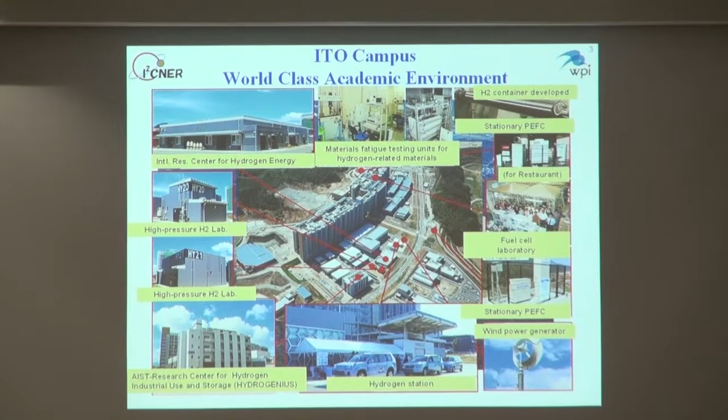I²CNER came into existence from a long collaboration between Kyushu University, which is a world-class academic environment with the best funded, best equipped facilities in the area of hydrogen research. The Hydrogenius Institute is a unique institute in this Ito campus, which you can see by taking a 10-minute walk down the road. And, of course, the University of Illinois, which is an institution with many years of tradition and impact.

In order to understand where I²CNER fits in the entire Japan energy policy, here I try to summarize the main points of the Japan energy policy, which I took from a presentation that our program officer, Professor Kazagi, gave. As you can see here, the energy policy is to facilitate renewable energy introduction.

I²CNER is all about renewable energy, clean and efficient use of natural gas and coal. I²CNER promotes CO2 management and mitigation.

Greenhouse gas emissions - this is the target that Japan had, slashing emissions by 25%. As we've read in the newspapers, this is something that is very difficult to achieve. The Japanese government has decided that we have to revise this. I²CNER is here to help the government of Japan toward this mission and objective.

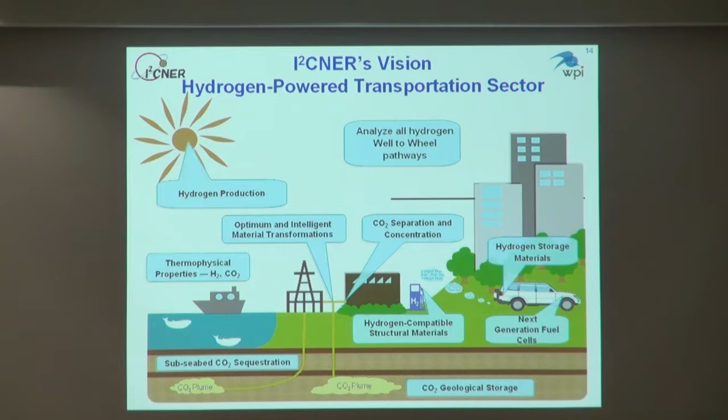In the case of our research agenda, we are organized in thematic research areas. This is a very busy slide that essentially shows how we are researching toward addressing these carbon neutral technologies. We have a thematic research area, a division as we call it, on CO2 separation and concentration.

We have one in thermophysical properties, where we try to understand the properties of gases at high pressure and high temperatures. We have hydrogen structural materials, where we try to understand how hydrogen interacts with structural materials. We work on next generation fuel cells, trying to address issues of durability.

We work on hydrogen production. I told you about photocatalytic hydrogen production, carbon capture and storage. We want to store energy, and of course we are working on issues of catalysis, materials transformation, and waste of energy in chemical reactions.

These are thematic research areas that are not isolated. They have common threads. For instance, catalysis is an issue that pervades many thematic research areas, such as next generation fuel cells and hydrogen-compatible materials, because you have the catalytic reaction when hydrogen gets absorbed into the materials, or in the case of carbon, how it interacts with saline water when sequestered. At the interface, what types of chemical catalytic activity we have.

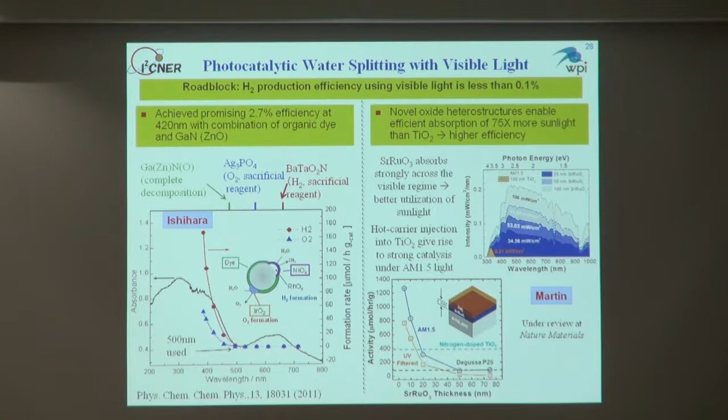We also try to push these efficiencies higher by using organic photovoltaics. My colleague Professor Adachi is using control of molecular orientation in layered organic semiconductors, and he is coming up with efficiencies that are quite high, almost 6.3%. If we push it to about 10%, then we may be able to talk about technology. So we are pushing hydrogen efficiencies here through all fronts, organic and inorganic semiconductors.

At the same time, in the area of organic semiconductors, we came up with third generation organic materials for LEDs. This work was just published in Nature, and Professor Adachi managed to come up with 100% electron to photon conversion. Organic LEDs is an interesting topic because my energy analysis division informed us that if we use organic LEDs judiciously in the United States, we can reduce primary energy use by almost 2%. This is something we need to take notice of. Professor Adachi is leading the way here.

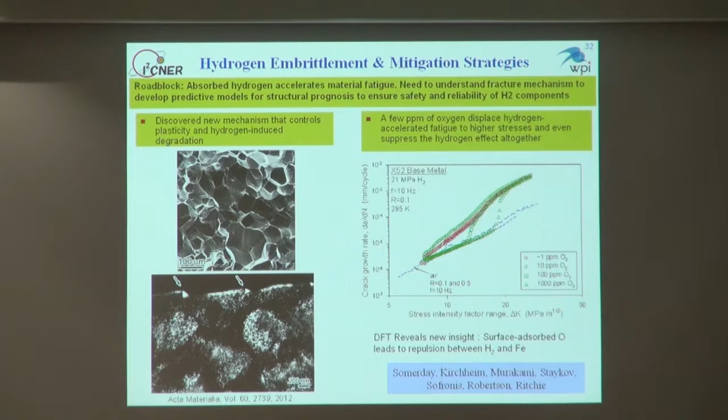In the area of structural materials, we are working to mitigate the degradation effects that hydrogen has on structural materials, because we need structural materials to transport hydrogen. I believe we are leading the world here. Our University of Illinois team and Kyushu University are leading the world in mitigating hydrogen degradation effects. Dr. Somerday from Sandia National Laboratories, who is leading this division, will give you an in-depth analysis of what goes on in this area.

We are working in the area of fuel cells using futuristic concepts. For instance, we try to understand molecular catalysis for fuel cells, and my colleague Professor Ogo informs me that perhaps we at I²CNER are the first example of a developed precious metal-free molecular cathode. This is something I would like to draw your attention to. I hope this will make news. This is something I²CNER will be proud of pretty soon, I believe, at least according to my colleague Professor Ogo.

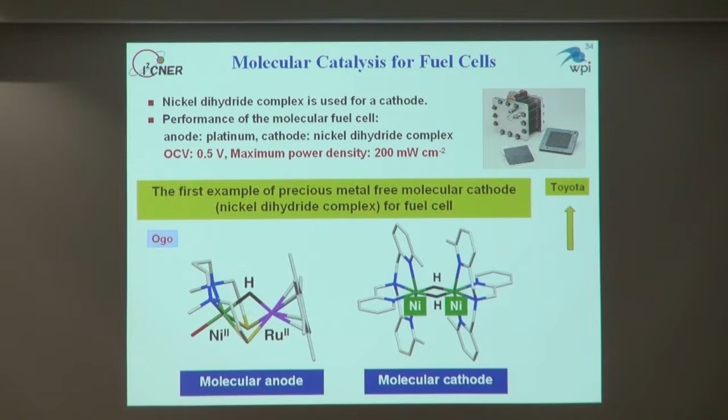We are working on turning CO2 into a useful product. We have a wonderful collaboration between Professor Paul Kenis, head of the Chemical Engineering Department at the University of Illinois, and Professor Naotoshi Nakashima here at Kyushu University. They are trying to use sunlight, passed through an electrochemical reactor, to turn CO2 into either a useful gas or a fuel. They tell me they recently achieved efficiencies of 45%. Remember, to go into technology we need energetic efficiencies greater than 50%. This project is an emblem of American and Japanese collaboration, and pretty soon I'm expecting we will have results here too.

Another project we are working on, as you've seen in the tour today, is the properties of supercritical CO2. I believe we are perhaps one of two universities in Japan devoted to fundamental science about properties of CO2. There are technology-driven centers in Japan for sequestration, but here at Kyushu University we are building fundamental science.

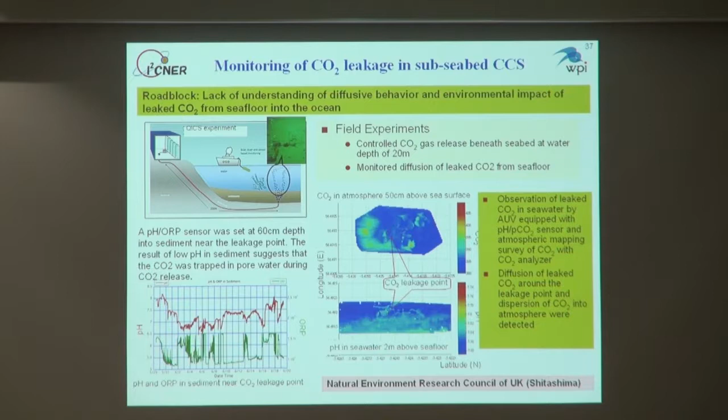Another example is that we are building science to monitor possible leakage of sequestered CO2. One of my colleagues, Professor Shitashima, works with colleagues in the UK for an experimental investigation of leaked CO2 sequestered on the sub-seabed. Professor Shitashima is checking the distribution of CO2 two meters above the seafloor, or 50 centimeters above the sea level. So we are developing these types of capabilities.

At I2CNER, as you know, we are a young institute. We are 2 years old, but this doesn't prevent us from garnering awards. I'm proud to present 3 I2CNER researchers who received the 2012 Somiya Award. This award requires researchers from 2 continents to be given, but here we have I2CNER researchers from 3 continents.

Professor Tuller from MIT, Professor Kilner from Imperial College, and Professor Ishihara, lead PI of our Hydrogen Materials Division.

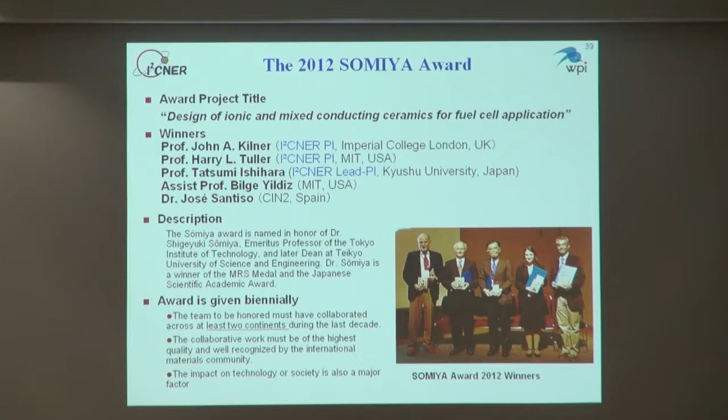The next topic I'd like to touch upon is that we are making fusion and interdisciplinary research the center of our operations. As you've already seen, we are collaborating, bringing disciplines together. Upstairs during the tour, we showed you a whole-system approach for energy production: capturing sunlight, storing it into a storage medium, feeding hydrogen into a fuel cell, and then getting back into the grid. This concept needs serious analysis because we need to analyze the various efficiencies of the entire system.

The optimal operation of the entire system doesn't depend on whether each component operates optimally. Sometimes one component needs to operate less optimally, and we try to understand how this energetic analysis needs to be informed by the technology involved. This is a very interesting concept, and hopefully pretty soon we will have results here too.

Again, I2CNER is about internationalization. I would like to read what United States Ambassador John Roos said on December 4th last month: 'What I do worry about is that the people-to-people ties, the ties between our younger generations—if our younger generations don't know each other, then the bonds will get weaker.'

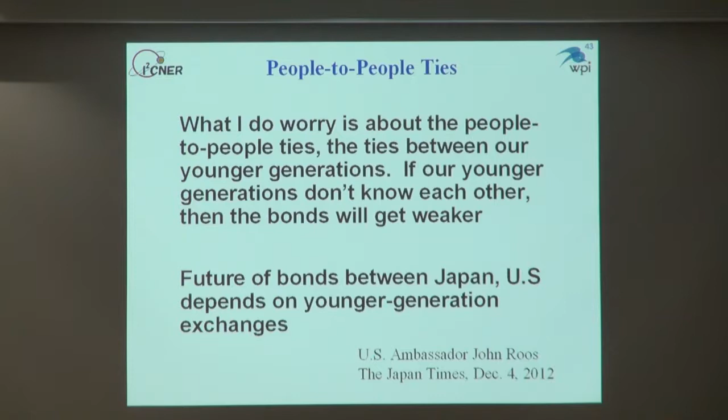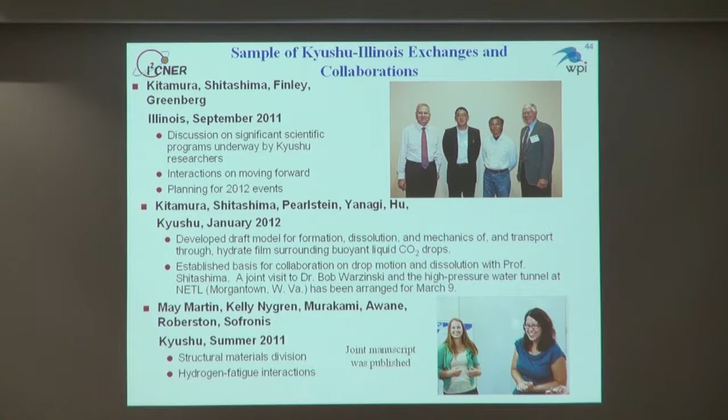I2CNER is a project that impacted activities beyond engineering—it impacted the activities of librarians at the University of Illinois and at Kyushu University. On February 1st, we had a presentation by our chief engineering librarians, Bill Misko and Mary Slembach, in collaboration with the Kyushu librarians, Amano and Omura. These four people, working together across the Pacific, are going to give us a set of scholarly information services that provide enhanced access to a myriad of online information resources.

It is going to be a wonderful tool for our I²CNER researchers. We can work together between the Kyushu libraries and the University of Illinois libraries. The librarians at both universities loved this project, and they tell me they love to search. We, the researchers, love to find. The librarians love to search. And searching between Japan and the US was wonderful for them. So we'll hear them February 1st.

Sandia National Laboratories - we are privileged here at I²CNER to have along with us Dr. Somerday, who is in the audience. He is leading the structural material division within our institute. He is a fellow scientist of the Sandia National Laboratories, and he is working with us. So in other words, here we have another international component, not only with the United States academia, but also with the United States laboratories.

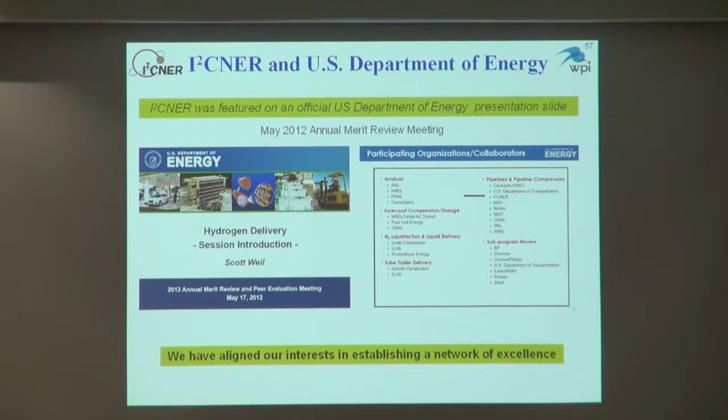Before I close, I would like to thank the Kyushu administration, President Arikawa, who is helping us get this project, to ramp it up, to move it from a transient to a steady state. They promised us we would have a building in January 2013. Yes, indeed, we are here in this very building enjoying it today. So we have Kyushu University behind us, and that is a good feeling that we are going to succeed.

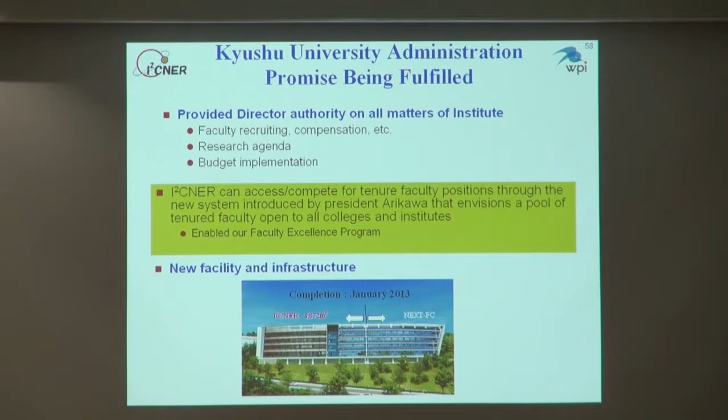17 exajoules. The US uses about 100 exajoules. Out of this energy, let me focus on the electricity. It uses primarily 7.44 - this is what it needs. This is what we get out: about 4 exajoules of energy annually. And as you see, the electricity supply is producing about 46% of the CO2 emissions.

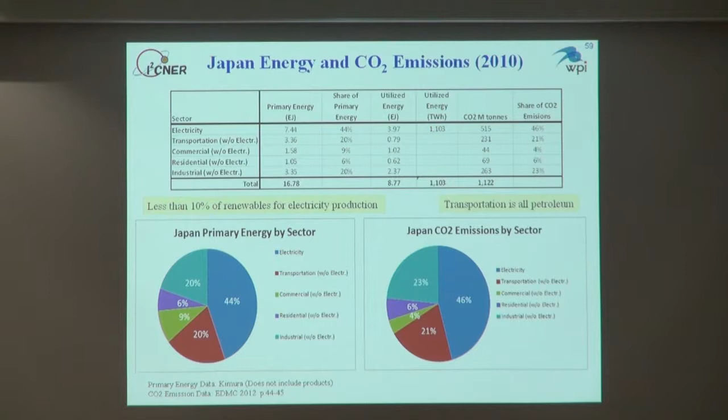So this is a very big chunk of the CO2 emissions, because electricity production essentially is based on fossil fuels here in Japan. So what I asked the Energy Analysis Division: can we do something here? Can we move away from fossil fuels? Can we do something renewable? Of course, this is a big concept for Japan. It is very difficult because the renewables are not as easily available.

They said even if we realize this medium potential that gives us the 4 exajoules, we need to develop cost-effective and efficient energy storage. Energy storage is the key concept for the use of renewables. So we are investing here in I²CNER in this direction. Hopefully next year I will know more about this and can show you where we are.

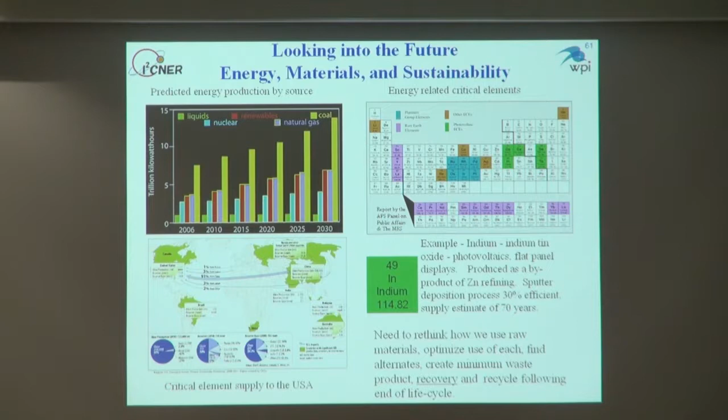Finally, we are thinking about the future. Sustainability is another issue. Key elements like indium are used for photovoltaics, but there is not an infinite supply of these rare earths, so we need to learn to use them sustainably. In order to do that, we need a radical approach away from classical designs, which focus on optimal performance. We need to also think about optimal recovery if we are to talk about sustainability. This is a concept I will hopefully revisit next year when we have more concrete plans for how I²CNER will evolve.

Before closing, I'd like to say we were honored by Crown Prince Naruhito, who visited our campus on October 1st. He talked with Professor Sasaki about fuel cells and fuel cell cars, and also helped refuel a fuel cell car.

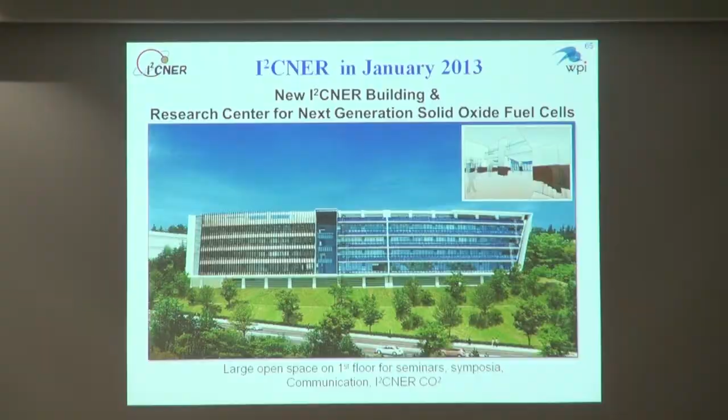Before closing, this is our building, January 2013. I'd like to draw your attention down here. We have the so-called I²CNER CO2, which means coffee and collaboration. This is something we do every day at 3 o'clock, we are out here in the hall sitting together for CO2, as we call it. Let's drink I²CNER CO2.

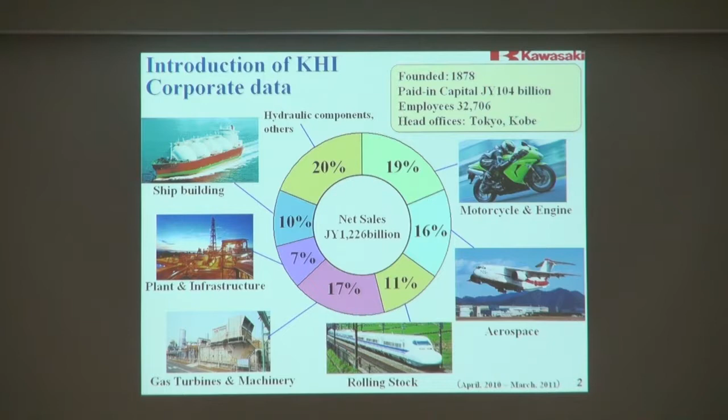This is part of the medium-term business plan of KHI, published 3 years ago. The president, Mr. Hasegawa, explained that KHI would promote the development of CO2-free hydrogen chain technologies. He said in the future primary energy will be renewables, nuclear energy, and fossil fuel with CCS. Secondary energy will be exchanged between electricity and hydrogen, mutually matching case by case. I think you can understand the meaning of CO2-free hydrogen. We are aiming at becoming the #1 manufacturer of hydrogen-related equipment. That is our company's policy on hydrogen.

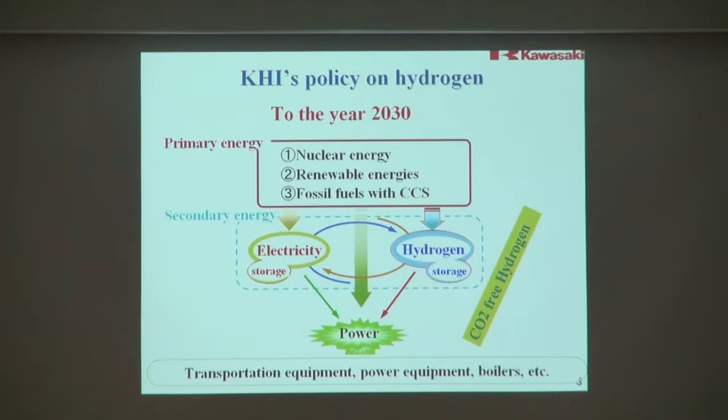I'd like to talk about the following: first, what is CO2-free hydrogen; next, introduction of the CO2-free hydrogen chain from brown coal; and finally, introduction of the HyGrid concept.

First, I'd like to talk about CO2-free hydrogen. We call it CO2-free hydrogen when it minimizes all CO2 emissions from production to utilization. There are various CO2-free hydrogen chain concepts which expand from overseas to Japan. For example, there is hydrogen from renewable energy such as hydropower, wind power, or solar power, and hydrogen from fossil fuel with CCS, such as coal, natural gas, or oil.

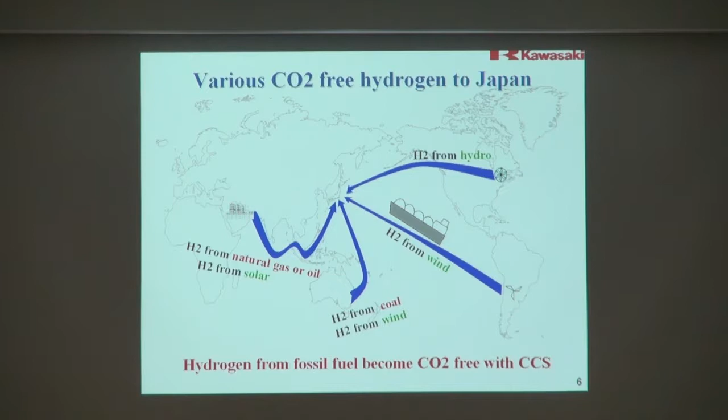We have simulated the demand of CO2-free hydrogen in Japan. The assumptions are shown in this slide. Cost of CO2-free hydrogen is 25 to 45 Japanese yen per normal cubic meter. CO2 reduction rate is 5% in 2015 and 80% in 2050. Nuclear limit is a maximum of 50% of total electricity. This simulation was carried out before the nuclear power accident. Renewable energy limit is a maximum of 15% of total electricity. CCS is impossible in near Japan.

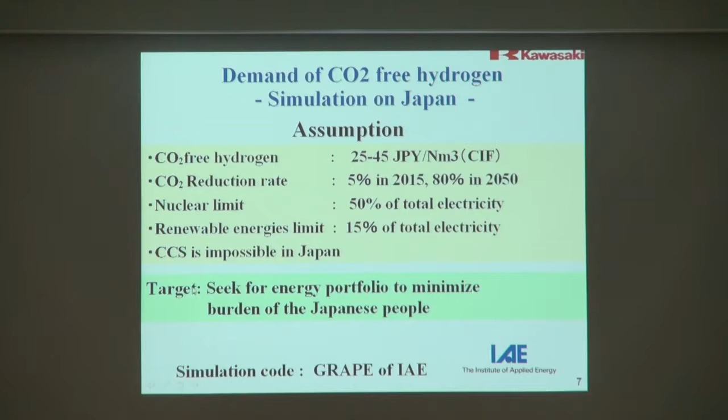This picture shows the sequence of the CO2-free hydrogen chain from fossil fuels. First, hydrogen is produced from fossil fuel with CCS. Then the hydrogen is liquefied, stored, and loaded onto a ship, then finally transported to Japan. In Japan, the hydrogen is used for hydrogen cars, fuel cell vehicles, hydrogen combined cycle power plants, fuel cells, cogeneration, steel making, and desulfurization at oil refineries. CO2-free hydrogen can contribute a huge amount of CO2 reduction as an alternative fuel.

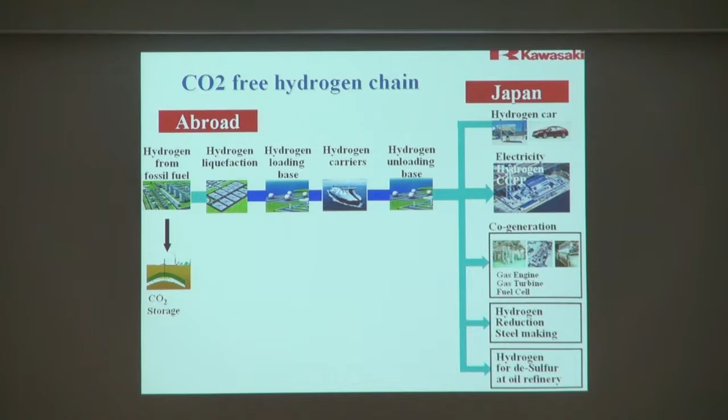About fuel cell vehicles and hydrogen filling stations. Japanese major automotive companies announced they would bring fuel cell vehicles into the global market in 2015. Japanese major gas and oil companies announced they would establish more than 100 hydrogen filling stations in Japan. The further future target is bringing more than 2.5 million fuel cell vehicles into the market in 2025.

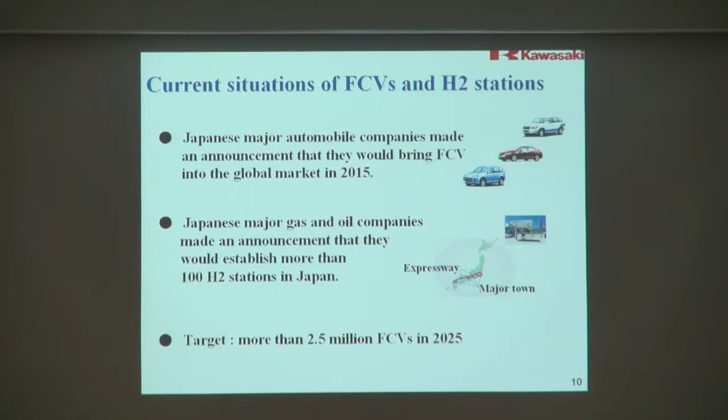About steel making with hydrogen reduction. The steel industry in Japan agreed with the Japanese government to reduce CO2 emissions by utilizing hydrogen in the next generation steel making process. They say the technology will be established by 2030 and industrialized by 2050.

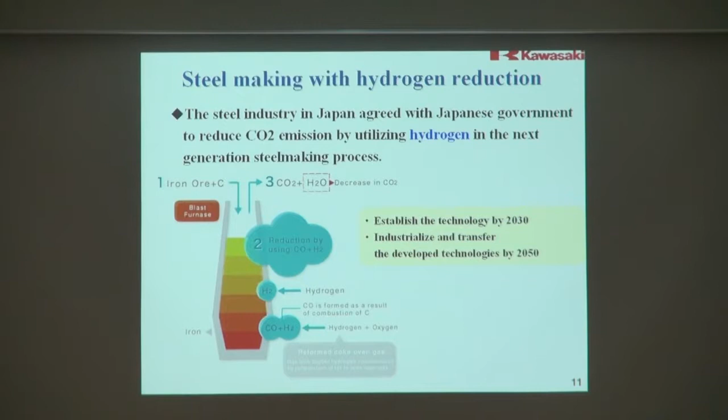About hydrogen for desulfurization at oil refinery. At oil refineries in Japan now, a huge amount of hydrogen is produced through the refinery process and consumed for oil desulfurization. A huge amount of CO2 is byproduced through this operation. If we convert this hydrogen to CO2-free hydrogen, we can reduce the huge amount of CO2.

About recent discussion for future energy strategy in Japan. After the earthquake and Fukushima nuclear power plant accident, CO2-free electricity from nuclear will not be expected. We are proposing the introduction of CO2-free hydrogen from fossil fuels. The points are low cost compared with renewable energies, massive and stable supply, and storage is possible, we say. This is the concept of the CO2-free hydrogen chain.

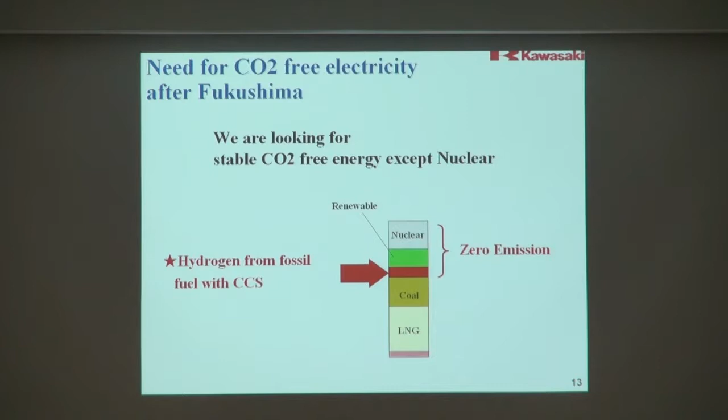Next, let me show the CO2-free hydrogen chain from brown coal. KHI has studied the CO2-free hydrogen chain from brown coal in Australia. I will introduce it. Hydrogen is produced by gasification of brown coal. The chain sequence is the same as what I mentioned before. We aim at operating the first commercial chain in 2025. We are speculating that more than 40 chains will be made by 2050. Incidentally, before this large chain, we are planning a small-scale pilot chain in 2017.

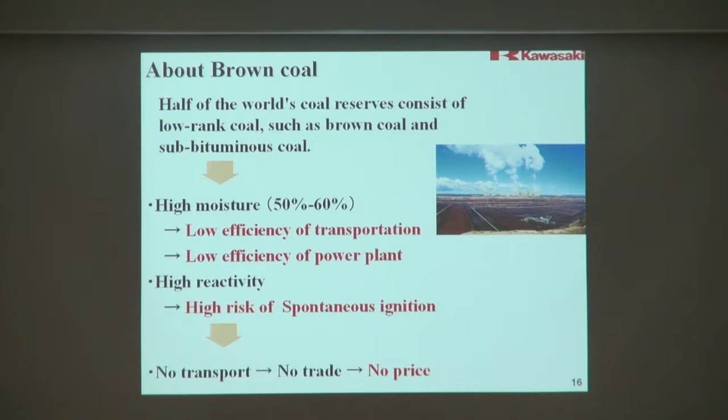I mentioned about brown coal. Half of the world's coal reserves consist of low-rank coal, such as brown coal and subbituminous coal. About characteristics of brown coal: it is high moisture, so low efficiency of transport, as well as conveying water. Furthermore, a severe problem is spontaneous ignition of dried brown coal. So now brown coal has no transport, no trade, no price in the world market. This is one of the cheapest fossil fuels.

We have conducted a feasibility study of this project in cooperation with Australian companies and with the support of both the Japanese and Australian governments. We studied such things as: where is the location of the hydrogen production plant? Where is the location of the hydrogen loading base? Which route should we take for the hydrogen pipeline? Is CCS possible? What are the regulations about hydrogen in Australia? How much are construction costs, facility costs, CCS costs? We went on with them.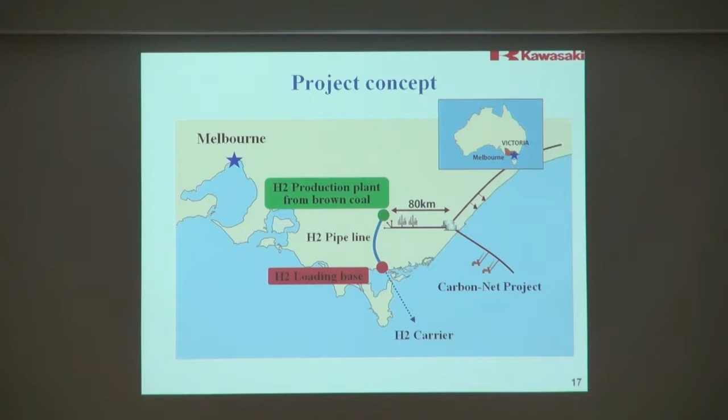This picture shows the hydrogen loading base and hydrogen carrier. You can see the liquefaction plant, storage facility, and loading place in far. Hydrogen of 770 tons a day is liquefied, stored, and loaded to the hydrogen carrier. The hydrogen carrier can load hydrogen of 11,000 tons per one time.

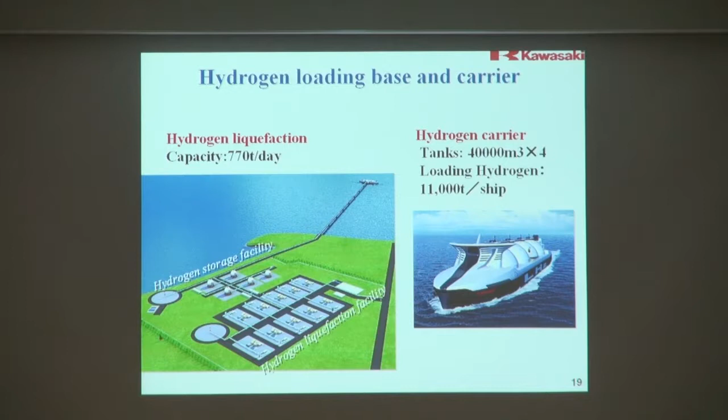In this case, transported hydrogen to Japan is 225,000 tons a year. Hydrogen cost CIF is about 30 yen per normal cubic meter. This amount of hydrogen can operate 3 million fuel cell vehicles, and it can reduce 5.7 million tons of CO2 a year. Or it can power a 650 megawatt hydrogen power plant, reducing 3 million tons of CO2 a year. It is a first chain. If the number of chains increases, we can reduce the cost, and we are expecting less than 20 Japanese yen per normal cubic meter towards 2050.

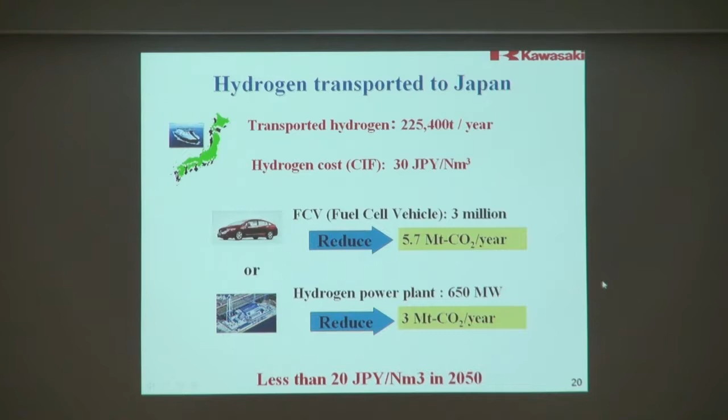There are 4 shortlisted projects of the CCS flagship program in Australia. As you may know, Zero Gen was rejected in 2011, and the Collie project in Western Australia was selected and put into the fiscal budget for the government in June 2011. Then CarbonNet was selected and provided the first budget of the government in February 2012. Currently, the CarbonNet project is in a phase of detailed investigations.

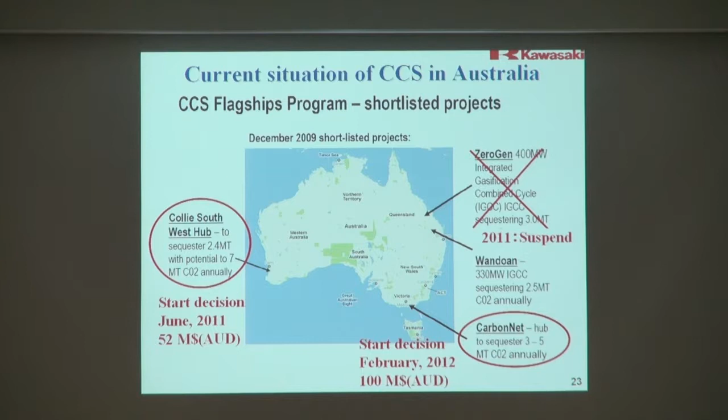So far, I spoke about CO2-free hydrogen from overseas. We started to study about utilizing hydrogen from renewable energy and its storage in Japan. As you know, Japan does not have much renewable energy compared with other countries. For instance, the capacity factor of wind power in Japan is at most 20%, but there are many places where it's more than 40% overseas. Therefore, we are considering hydrogen from renewable energy transported from overseas.

However, pure Japanese renewable energy is very valuable from an energy security point of view, although it is expensive. We have to use such hydrogen and electricity effectively, making use of their characteristics. The HyGrid study group aims at studying this.

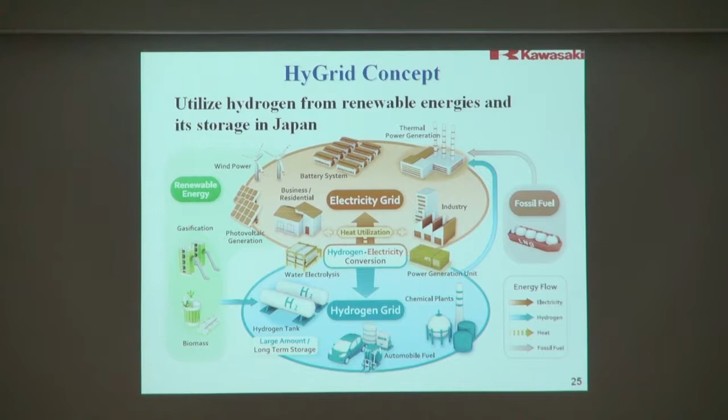This picture shows the HyGrid basic concept. It is possible for hydrogen to store large amounts of energy for a long time, so it can contain long periods of fluctuation of renewable energies such as wind power. On the other hand, battery is effective for containing a small scale of energy over a short period of fluctuation. So we have to construct a reasonable system combining hydrogen and battery.

We have to study how to utilize hydrogen as an energy storage.

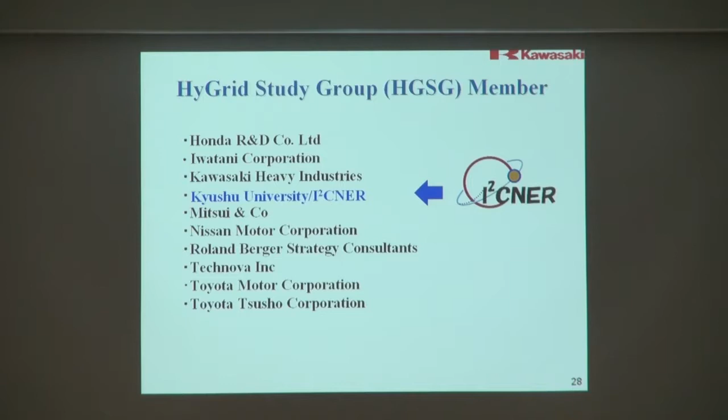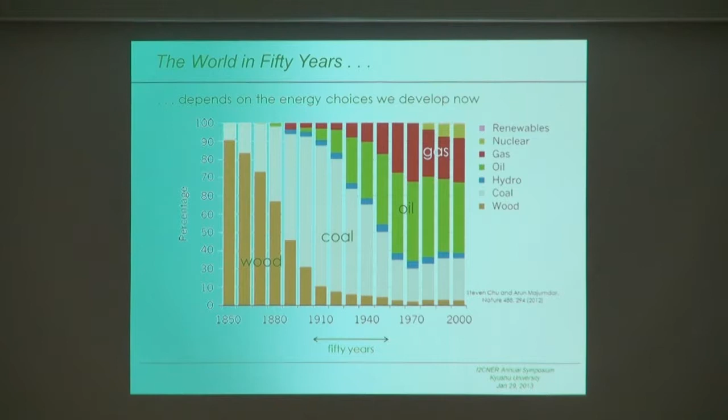So normally when you look at the 50-year future, the conventional approach is to take the present, ask what could happen, what kind of improvements in efficiency and cost reductions could occur, look at the relative costs of technologies, and project 20 or 25 years out. Hardly anyone actually projects 50 years out. What will happen? That's the future—that's the present extrapolated.

I would like to take a different approach. I would like to say, in view of the importance of energy for society, let's start with the kind of society that we want in 50 years, and then ask what kinds of energy technologies and innovations and discoveries do we need to enable that society. So it just turns the cart and the horse around.

The point is, again, 50 years is long enough for energy R&D to work. So we'll steer the energy society nexus toward the strategic society that we want, instead of simply taking the energy advances that occur and living with them.

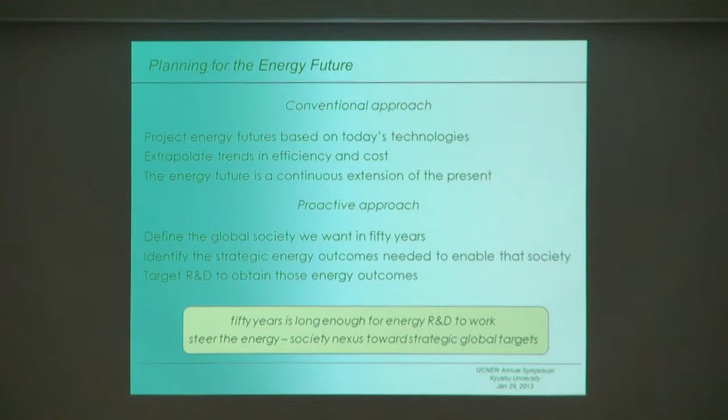Here's the kind of global society that I would like to have, and I think most of us can agree with many of these things, though you may disagree. Rapid growth of developing economies - China, Asia generally, India, Africa - these economies need to grow. Steady growth of the developed economies, because if they don't grow, they will lose the quality of life and lose the advantages they now have to the developing countries. So we want that as well.

Aggressive pursuit of discovery, science, and innovation, because that's how you get growth - it's from innovation and new technologies that growth occurs. Rapid deployment of the innovative technologies, that goes without saying. Lively communication, trade, and exchange of people and ideas across national and regional boundaries, a kind of globalization everyone should participate in, requiring interaction, as in the scientific world - interdisciplinary discussion and interaction is so important. And finally, a globalization of opportunity, so every country and region can participate in the technology, economic growth, social and cultural advances.

So the shorthand for this is a vibrant, interactive, inclusive, and rapidly advancing global society. If you take those as your guiding principles, you then ask, what energy outcomes do we need to achieve this kind of society? I've chosen three - you can do this in many ways, but I think these cover a lot of the ground.

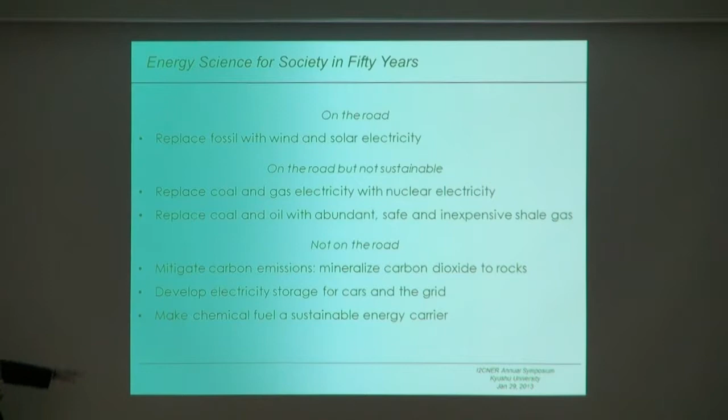The second category: on the road but not sustainable. I would say nuclear electricity is in that category. There are reasons - environmental concerns and fear of accidents - that keep us from deploying it on a wider scale. We need to address those concerns if we're going to make nuclear a player.

And the second one, shale gas. In the United States, it's rather abundant - we've been drilling with hydraulic fracturing to recover shale gas. The U.S. seems to be ahead of most of the rest of the world, but if you look at the resources, they're there globally. There's a challenge though - it's not sustainable, I'll say, because of the effect on the environment. But there are ways to address that issue.

So if you can address these two concerns, here are two opportunities. And then things that are not on the road and are a little bit more visionary: mitigate carbon emissions.

We all talk about, and we heard already today about, carbon sequestration geologically. There's another option I'd like you to consider, and that is turning carbon dioxide into carbonate rocks. It turns out this may be more feasible than you think.

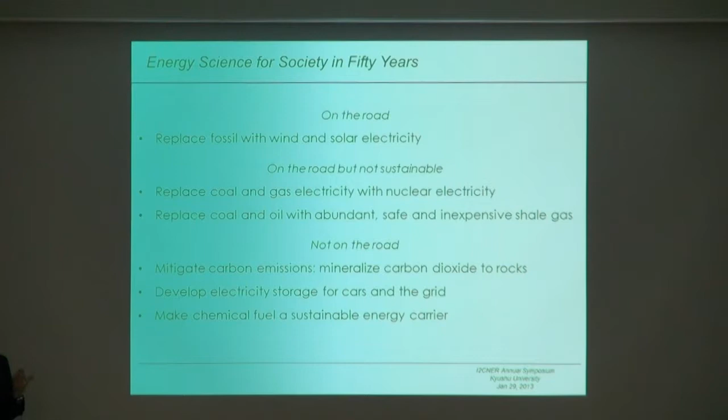Then develop electricity storage for cars and the grid so that we can have both transportation and renewable energy enabled on the grid at a large scale. And the final one: make chemical fuel a sustainable energy carrier. We've heard a little bit about that already.

So the first one, wind and solar electricity—this is US-centric. Here, since 1980, is the penetration of wind and solar on the electricity grid. You can see wind outpaces solar dramatically because it's a lot cheaper and the technology is more mature. This curve is rather steep—about 30% a year is the rate at which wind is increasing, and solar is not far behind. It's now about 2% of total electricity in the US.

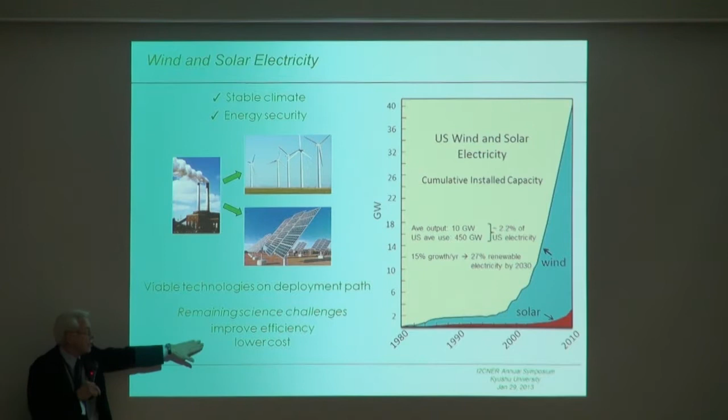But at growth rates of 30% a year—I've taken 15% just to have a number—you would have 27% renewable electricity by 2030 at these growth rates, if you could maintain them. So it's quite possible. The challenge is the price is too high, so you want to get the cost down, and the efficiency, especially for solar, is not as high as you'd like. Those are the science challenges.

How about safer, higher performing nuclear electricity? It's wonderful because it doesn't produce any carbon dioxide. However, the challenges are safety—there are accidents. It's 1960s technology, most of it, so we can do better. And what do you do with the spent fuel?

So let's imagine you wanted to deploy nuclear electricity. What would you have to do? You'd have to change the efficiency from about 35%, which is what it is now. There's no reason you couldn't have 50% efficiency—that is, 50% of the energy of the uranium goes into electricity. How would you do that? You'd operate at higher temperatures, which is a strain on materials. You get the higher temperatures by cranking up the neutron dose inside the reactor, so you have higher radiation damage.

And at those high temperatures, or almost any temperature, you get corrosive environments. So the problems are mainly materials, and those are problems that can be solved. We can make materials better than they are in the 1960s, and better than they are today.

There's another issue, and that's the spent fuel. The idea of most countries for storing spent fuel is not unlike carbon dioxide: put it underground. This is a cartoon of what would have been the Yucca Mountain storage facility. It's really just a tunnel in a hillside, about 300 meters below the surface to keep spent fuel out of the rain and weather, and about 300 meters above the aquifer to keep it out of the water supply. You hope it just stays there quiescently for a very long time.

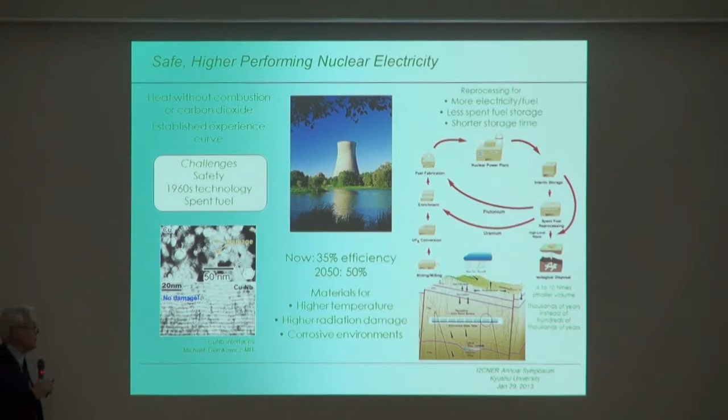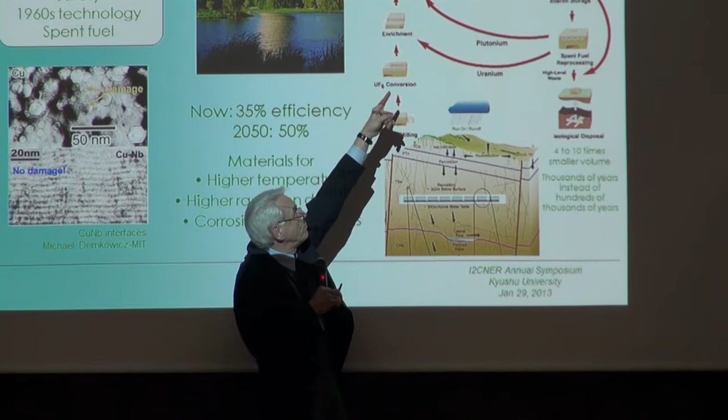If you don't reprocess the fuel, it can be hundreds of thousands of years, or even longer, some people say. If you do reprocess the fuel—and that's what this cycle up here is showing—here's the mining of the fuel. You put it through the plant once, and at least in the US this is the case, and when it's about 4% used up, you store it. But you could get that 96% of the energy back out by reprocessing. Going around this loop a few times, what you have left to store is much less—somewhere between a factor of 4 and a factor of 10.

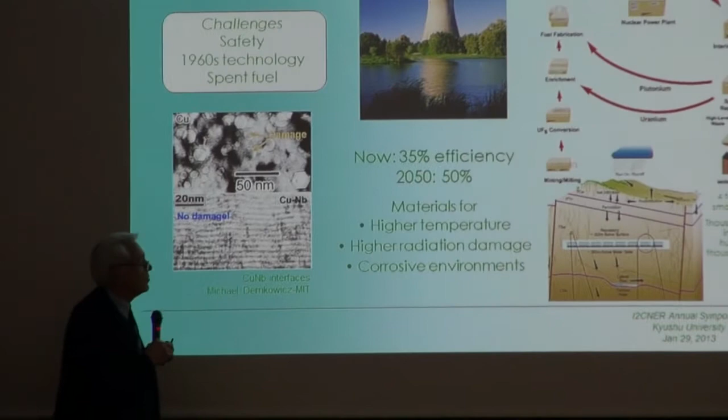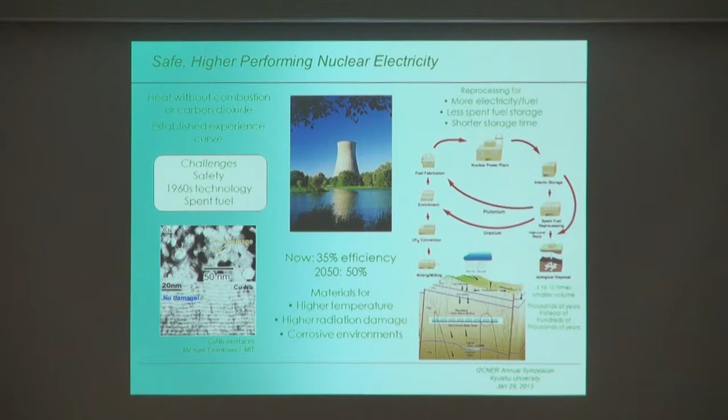So you can solve this problem with science. The problem of safety, one has to address—it's as much a technology problem as a science problem. My feeling is that one can do that. We haven't seen that happen yet, but it's certainly within the realm of possibility.

How about shale gas? Well, if you think about the price of shale gas here in the US, in some energy units, it was about $12 at the peak between '05 and '08. The average off the peak was about $8, and since January of last year, it's hovered between $2 and $4. So it's a dramatic effect on price, and that determines, of course, the deployment.

But the expectation is that shale gas was going to be abundant and cheap. And from a carbon dioxide point of view, it's an advantage because it puts out about half of what coal or oil does. So when you look around the world, the rest of the world hasn't really developed or implemented hydraulic fracturing for shale gas, but they could.

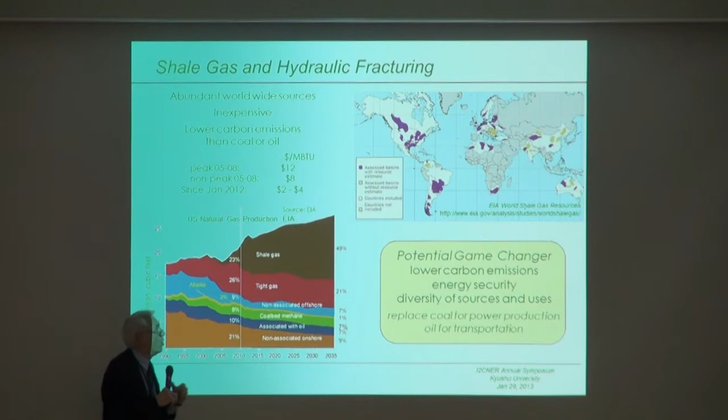This is just a partial picture. Everything in gray, we don't know, but everything in white or a color, at least there's some estimate of what the shale gas potential is. You see it's pretty evenly spread around the world. So unlike oil, and even sunlight which falls mostly in deserts, shale gas could be a globally available resource.

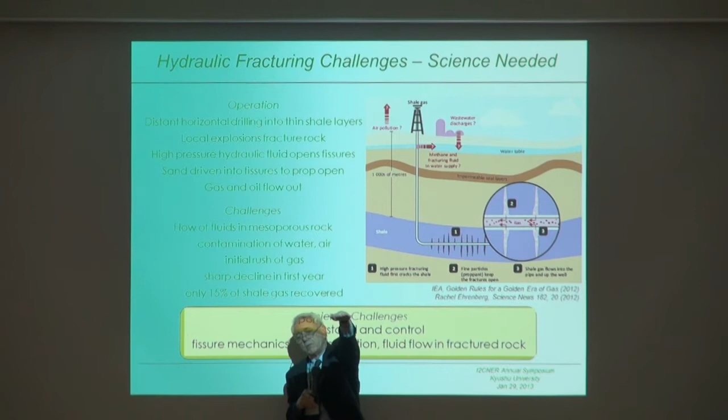But there's a problem, and here's the problem: it's the effect on the environment. Here's how you drill for shale gas, how you recover it. You drill down till you hit a shale seam, which may be rather narrow. You turn your drill horizontal, and you drill as far as you can in this direction to access as much of the shale seam as you can. You may turn the drill 360 degrees so that, again, you get as much of the shale seam as you can. Then you put in high-pressure fluids, some filled with sand.

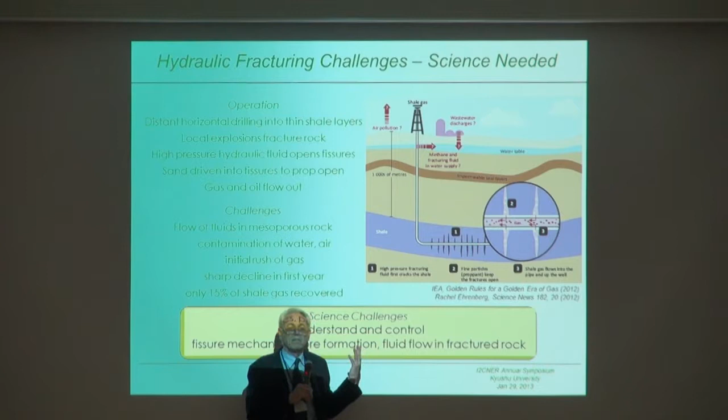So it's a bonanza at first. In the first year, it's wonderful. A lot of gas comes out that you wouldn't have gotten otherwise. The rate slows down dramatically after the first year or two, and finally tapers off. You get only about 15% of the gas which is in the shale deposit out by this technique.

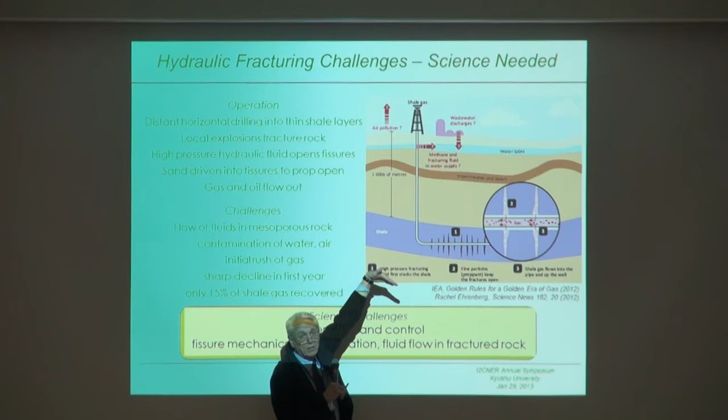So there are problems from the production point of view, and there are problems also from the contamination point of view. Those fracking fluids, where do they go? Well, they might leak out of the shale seam and into the ordinary rock, into the water supply. There can be leakage of all kinds of horrible fluids on the surface, and questions of what you do with the water and fluids that you do recover. These things need to be looked at.

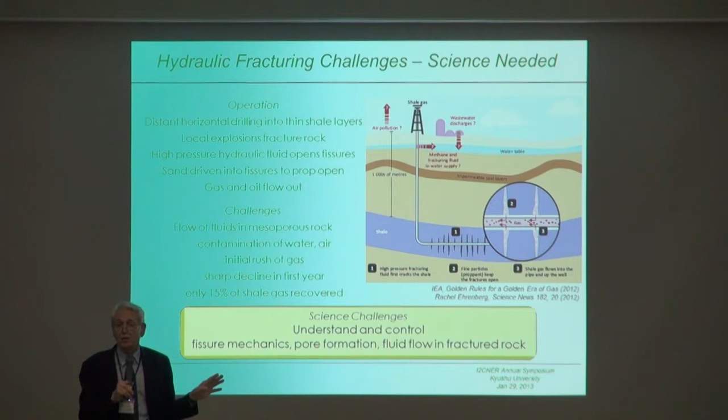But the point I want to make is that there's a science challenge here. Let me frame it this way: there's a regulatory challenge here. We could simply regulate the shale gas industry and say don't do anything that's going to harm the environment. Probably a good idea, at least in that direction. That's going to cost money for the regulators to watch, and it's going to cost money for the producers to change their ways.

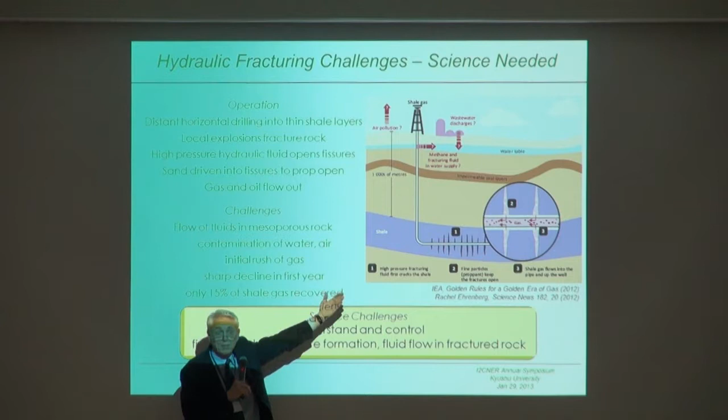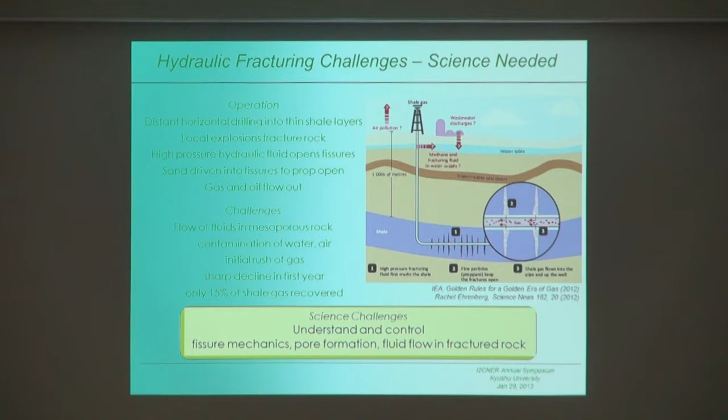Wouldn't it be better to understand the science of how these cracks form and what happens to the fracking fluids within the cracks, and control it, understand it to the extent that you can control it, and simply eliminate the problem? Again, a little bit of regulation is needed, a little bit of motivation, but you would increase the performance of the technology. Instead of 15%, you could get maybe 30%, and you would decrease the threat to the environment, and the cost would be much less. So there is an opportunity using science and discovery to make shale gas much more acceptable.

How about carbon dioxide mineralization? We all talk about carbon sequestration, and we heard already today about that, and it's a wonderful opportunity, of course. There's another one, and if you think about it, it has some advantages.

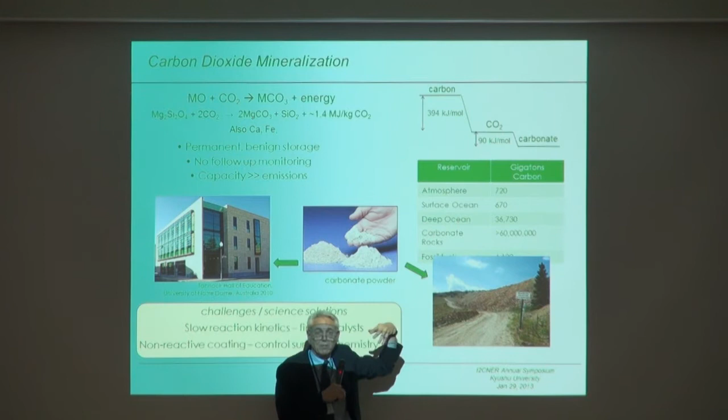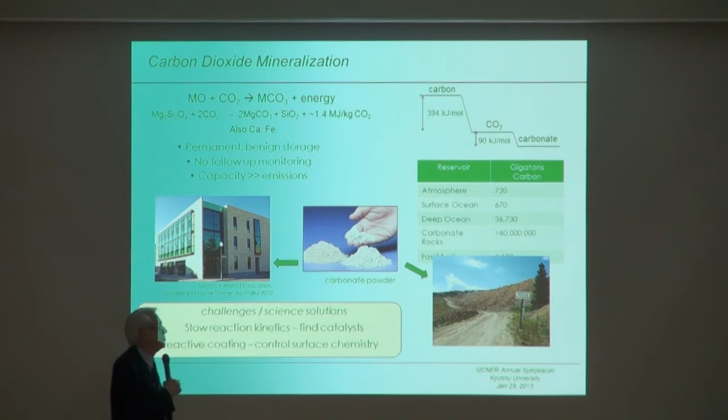The deep ocean is huge, and everyone says the deep ocean can handle all the carbon we can produce. Quite true. But carbonate rocks have even more, more than 1,000 times more than the deep ocean. So there's a reason why there's this many carbonate rocks. They're really stable in nature. So if this got covered up, the fossil fuel is, but you can see it's only 4 digits. So we could easily handle what the fossil fuel carbon dioxide emissions would be with carbonate rocks.

What do you get? You get something that looks like this. You can use that to build buildings like this one, built from carbonate rock. Or you could backfill a mine or just some open space on the surface of the earth with carbonate rock and let it sit there. And since it's so stable, you don't have to monitor it.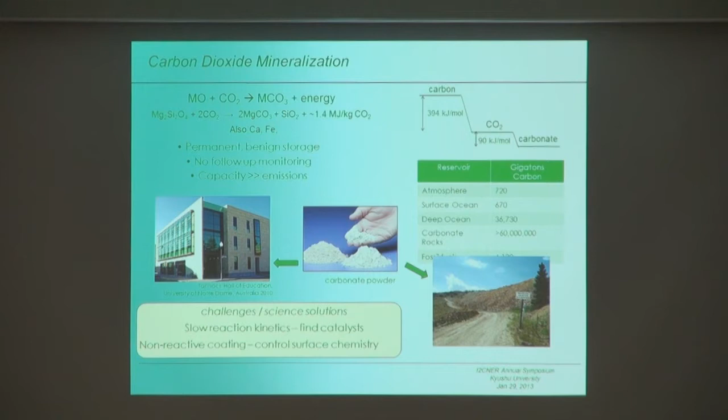The problem, again, a science problem: slow reaction kinetics. So it means you have to find a catalyst for it. And non-reactive coatings, the surfaces get passivated. Well, you have to control the surface chemistry. You can do that rather easily in a reactor on the surface of the Earth, much easier than you can, let's say, underground, where these same reactions take place, let's say, in carbon sequestration. But if you do it on the surface, you can really control it.

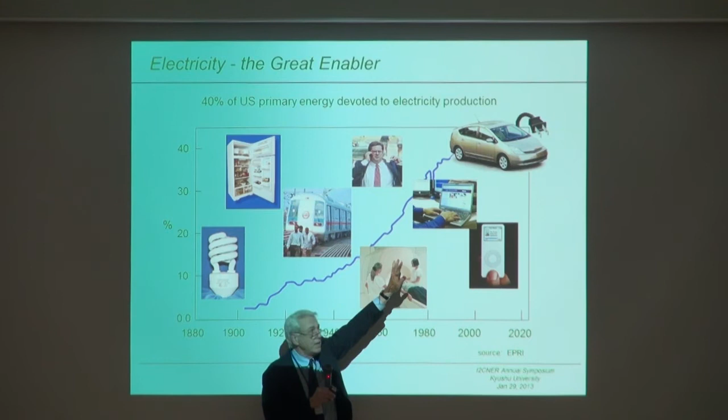So there's an opportunity. How about electricity? Here is a graph of the percentage of primary energy in the US that is devoted to electricity. It goes from almost nothing in 1900 to about 40% today. And there's a reason for that. Here are some of the things you see, pictures of things that it does. It's really, really versatile. Here's the grid. So what's so good about it?

It can take energy or power from almost any source. So nuclear, coal and gas combustion, solar thermal, hydro and wind, where there's no combustion at all, mechanical motion, so wind, or hydro, solar electric, you don't even need any motion, or fuel cells. Send it through the power grid, and it can do a lot of things on the use side. Here are some of them. So it's remarkably versatile, and it can accommodate the old fossil sources or the new renewable sources.

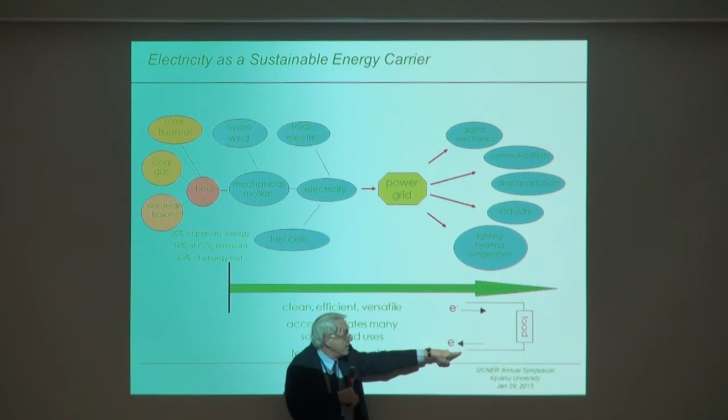And once you get past this point, once you've made the electricity, it's really clean, it's really efficient. So the grid is about 90% efficient. Electric motors can be 95% efficient, and so on. And it's really versatile. And here's the cartoon: the electrons go in on one side, give up their energy to the load, come back on the other side, and nobody knows they've ever been there. So it's completely neutral on the environment. So that's the advantage. That's why we like it.

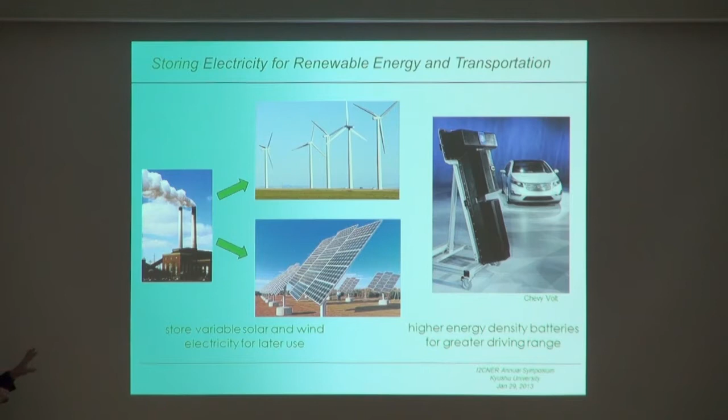But there's one thing it can't do. It cannot store energy. Right now you have to use energy at the rate that you make it. Or it's actually the other way around: you have to make it at the rate that you need it for the grid. So there are two big opportunities for storage. One is storage that allows more than, say, the 2% penetration of solar and wind, which is now in the United States, and the world number is not very different from that. So if it got up to 20 or 30%, you would have to store it, so you could smooth out its peaks and valleys. And the second opportunity is drive your car on electricity, and the challenge is shown here.

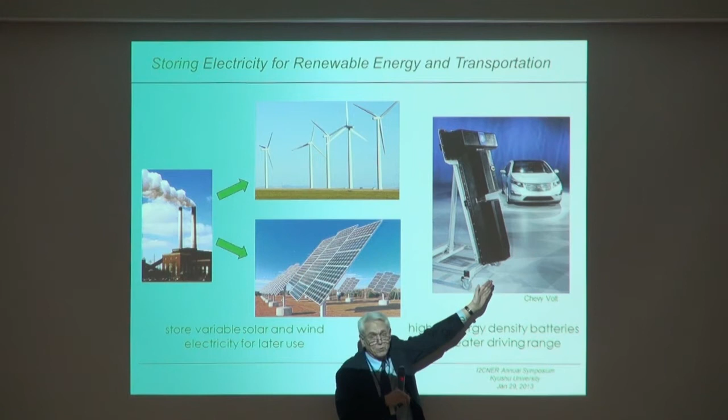This is the Chevy Volt, the battery is almost as big as the car. And this battery in the Volt, as it happens, has a range of 38 miles on a full charge. So you want to go farther than that. Of course, the Volt has a gasoline engine which gets you farther than 38 miles, but you need to do better.

So it was mentioned, actually, Petros mentioned earlier that a new award was made in the United States to the Joint Center for Energy Storage Research, which we abbreviate and pronounce JCESR. And the point of that, that's Argonne and 13 partners, will look at energy storage opportunities beyond lithium-ion. So lithium-ion is the most successful battery technology for the last 20 years, for sure. But we need to look beyond it because it probably can't give a factor of 5 higher energy density, which is about what you need to make cars and the grid and renewable energy on the grid viable.

So here are some of the things. I won't spend much time, but there are 3 ideas. Lithium ion, when it goes back and forth, has 1 charge.

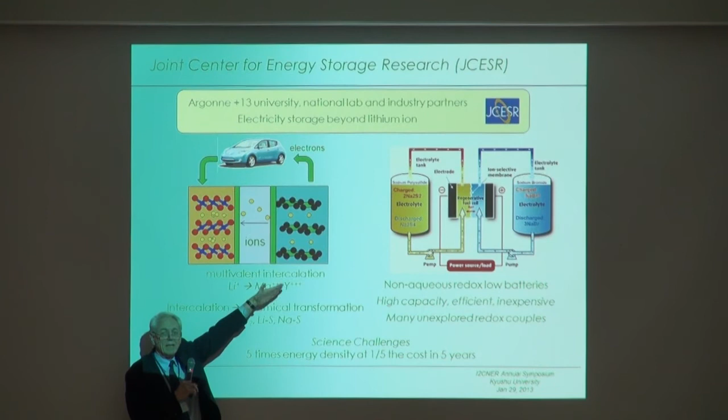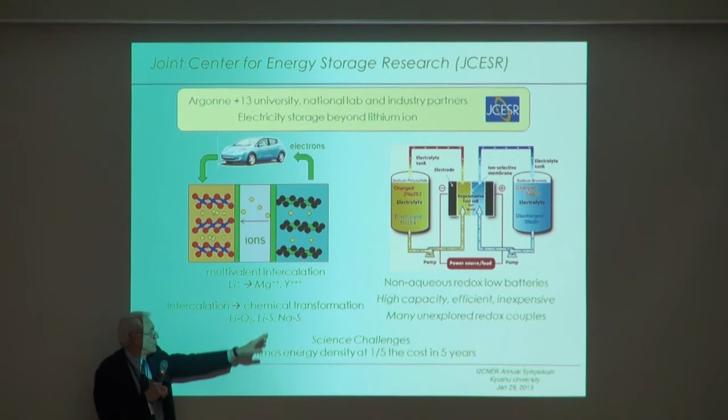It stores and releases energy. Why don't you use magnesium, which has 2 charges, or yttrium, which has 3 charges, and double or triple, in principle, the energy stored? Instead of intercalation, which is what happens at cathodes and anodes in most batteries, certainly in the lithium-ion battery, why don't you use a chemical transformation? So lithium reacting with oxygen or with sulfur, or sodium with sulfur - you can get higher energy density stored in those bonds, maybe a factor of 10 higher.

And why don't you convert these anodes and cathodes, instead of solid materials, why don't you make them liquids so that you can store them in big tanks out on a farm somewhere? The footprint is large, but the cost is low. So there's lots of opportunity for science exploration here.

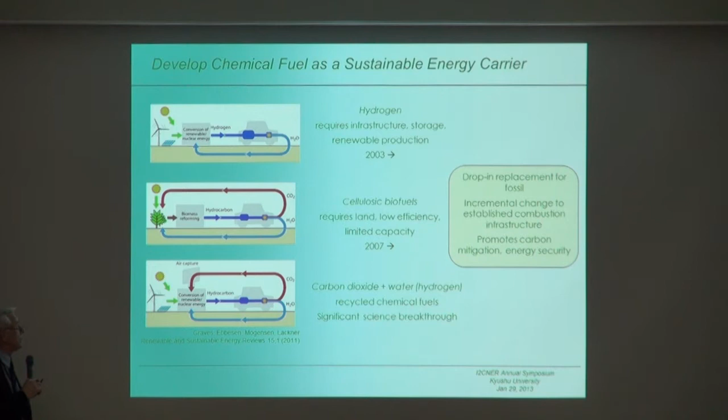The last thing I wanted to talk about was making chemical fuel a sustainable energy carrier. I have 3 cartoons here, which are all taken from a recent paper. Hydrogen would do that, and we all know, especially this crowd, how sustainable hydrogen as a chemical energy carrier is. I put the date 2003 because, at least in the United States, that's a time when hydrogen was in high visibility. What happens is, of course, the hydrogen comes out, reacts with oxygen, you get water, you come back, you have to split that water on the production side and reuse the hydrogen.

There's another way to do it, and that is cellulosic biofuels. So here you use plants to do the regeneration. Again, you burn now the hydrocarbon - it's not hydrogen, it's a hydrocarbon. Produces CO2 and water, and you recycle both of those through various means, through the atmosphere or through processing the plants to reproduce the plants, reproduce the fuel. So this is a completely closed cycle.

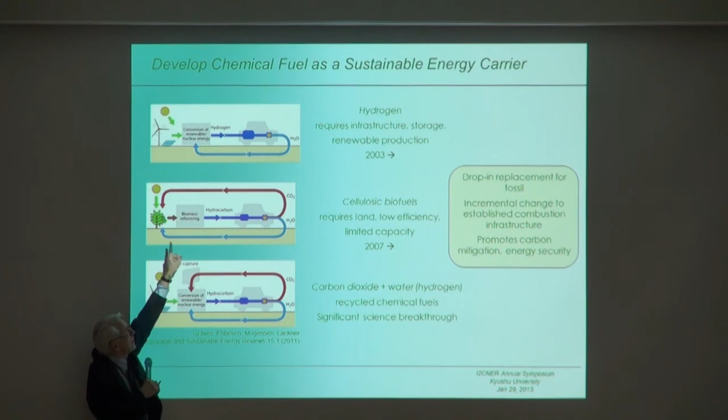As it happens, the best estimates, at least in the United States, are that you could get about 30% of transportation fuels this way, but not even 50% or 100%.

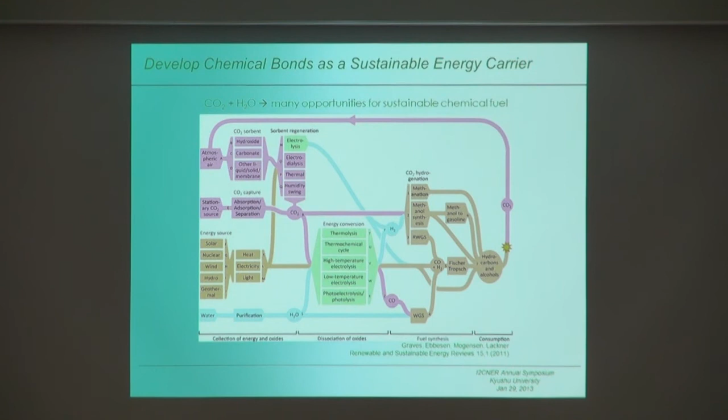There's another way, and that is carbon dioxide and water recycled not through biology, but through artificial means, taking, of course, energy from the sun or from the wind. The advantage of this is, unlike the photosynthesis route that plants use, there are many routes here that you can use artificially, much more than just the photosynthesis. Some of them are shown here - never mind what's on there - but some of the things we already heard about today involve reprocessing spent CO2 to fuel and using it again.